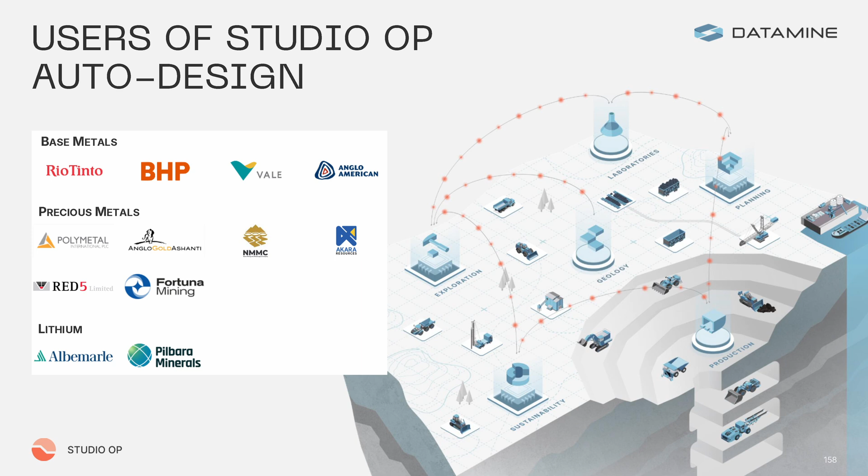So if everyone here is strategic, you would all have a good understanding of NPVS and MindMax. You may not know quite as much about Studio OP. OP is our design, reserving, and tactical scheduling solution. What it will offer everyone in this room the most benefit is the ability to utilize our auto design toolset, and that is what the majority of the updates provided in this presentation focus on. Being our premier design package, it is used globally and by a number of major operators across a significant amount of base, precious, and alternate metal operations. I know a few of the guys in this room I've worked with previously on support, specifically for OP Auto Design.

And what I would like is to be in a future where everyone's strategic schedules are just like Mario's, where everything is using auto design. Auto Design is definitely the package that is able to provide that capability. And for everyone that is coming to the workshop tomorrow, you're going to have some fun. We're going to do 2 phases within 20 minutes, hopefully. Let's see how we go actually getting the licenses to turn on first.

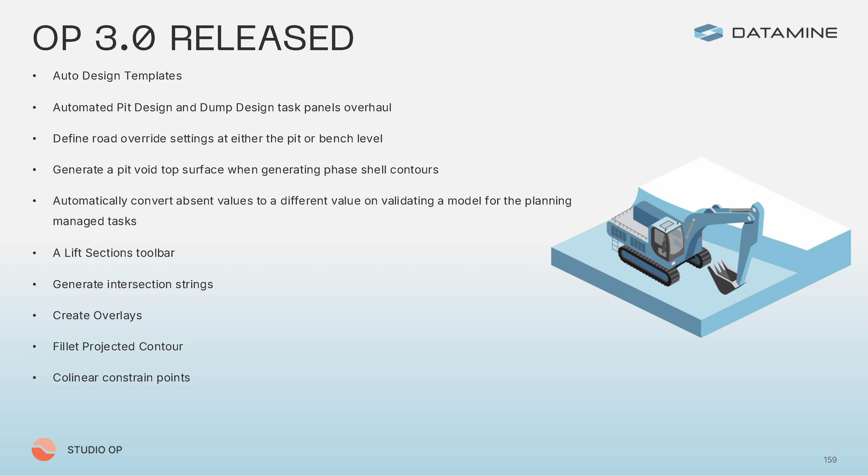Looking at the major capabilities that were released in our latest 3.0 release, we provided updates to auto design templating, updates to automated pit design and dump design task panels, just improving that UI for usability. Road definition override settings are now at the pit or the bench level, generating some pit void top surfaces, automatically converting absent values, lift sections, etc. And some of these I'll go more specifically into with some videos so everyone can actually see what I mean.

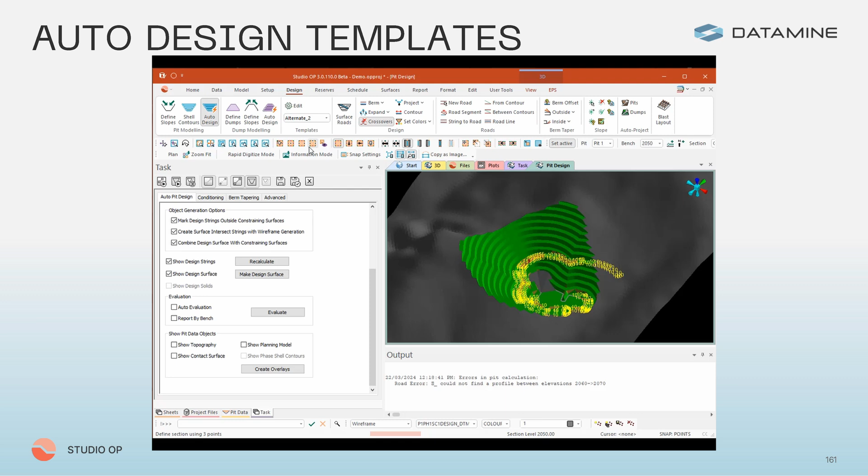Looking into some of the specific capabilities that we've improved in 3.0. So with OP 3.0, Auto Design now incorporates a visual templating toolset. With the Auto Design templates, you're able to define and rapidly change how you visualize each of the design controlled objects. These include the design, constraint, and centerline control strings, as well as the wireframe surface and solid, and finally the block model that's associated with that design.

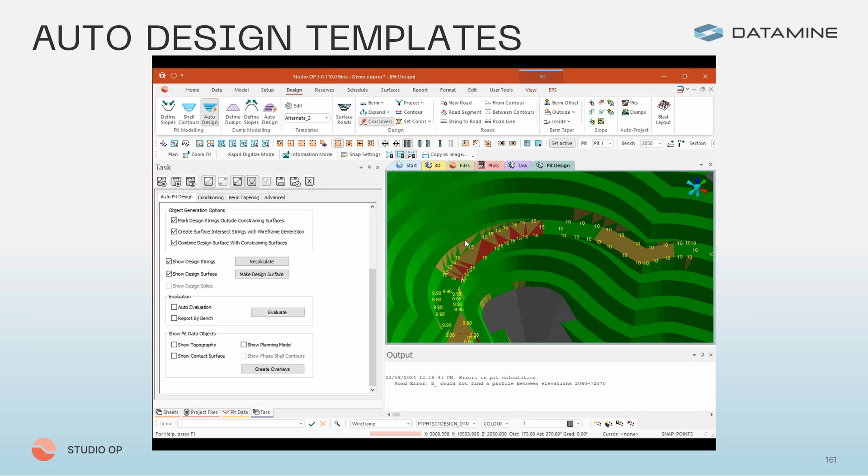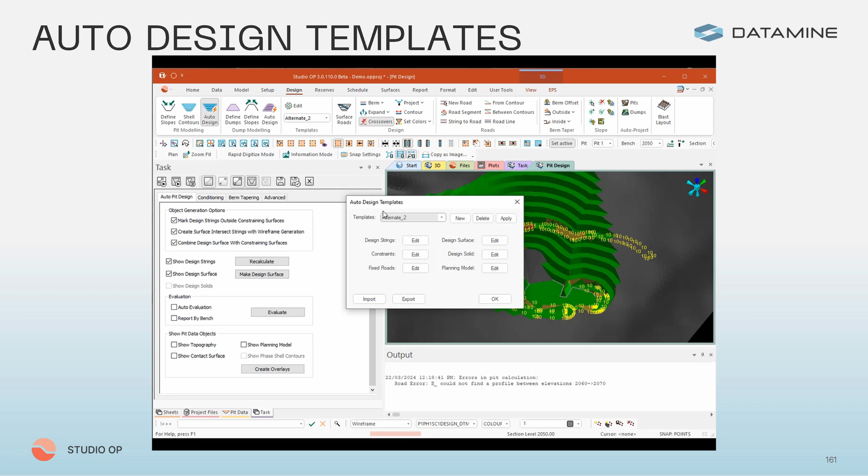This does obviously have a number of significant applications, both within the design workflow itself, as well as external communication capabilities. We are also able to share team or company visual styles, to be able to have easily accessible view states for common design requirements, all the way through to compliance checking and screenshotting for use in presentations or release packs. The templates can be changed on the fly through the design ribbon, as well as exported and shared with other team members.

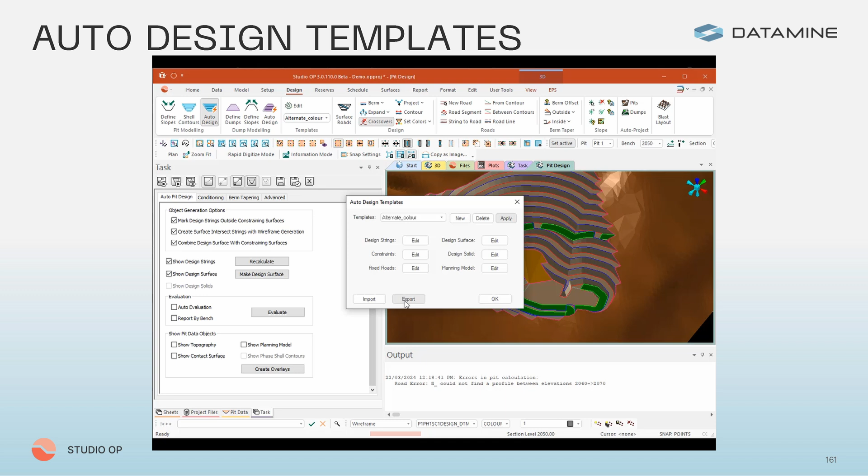Looking at our adaptive road controls, Auto Design road definition and editing tasks have been streamlined. This includes context control for the new and edit states, which were previously separate tool sets. This allows the system to guide the user through what controls they are able to use at each stage of design.

The start and end elevation controls now also provide the ability for the user to either control directly through 3D selection or by selecting the elevation directly.

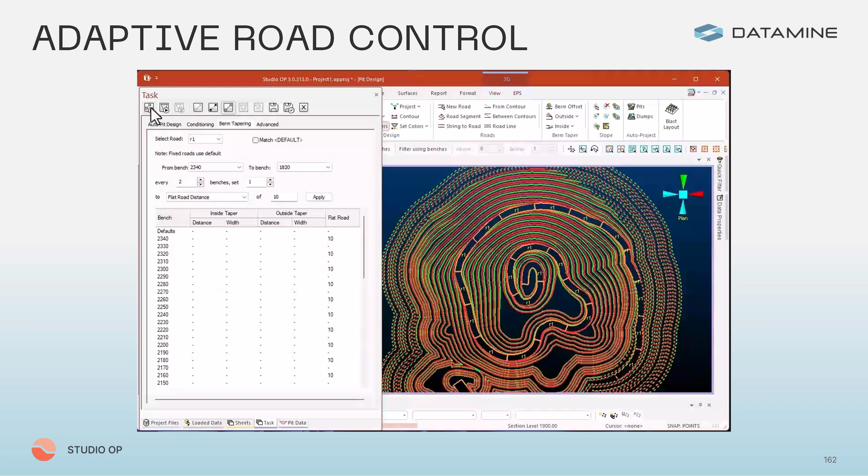Additionally, the berm tapering controls have been updated so that each road can be independently assigned tapering and flat definitions. Patterning controls have also been included so that you can speed up the application of repetitive controls.

On the geotechnical standpoint, the user is now able to specify if they want conditioning fillet controls applied to projected objects. This enables better control of the design, batter compliance, and enables bullnoses and other features that were not easy to implement in previous versions of OP Auto Design.

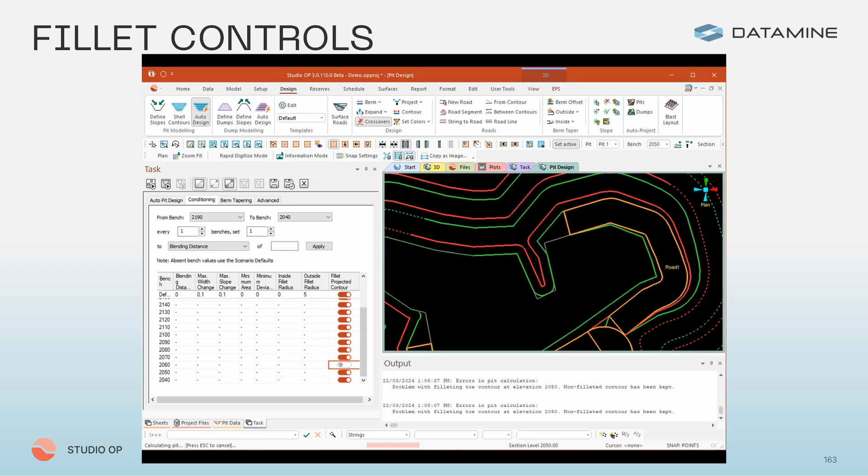By default going forward, projected objects will not be filleted so that we better comply with geotechnical constraints, though it can still be turned on if that's a desire from the specific client.

We also provide a new advanced projection option. Under the advanced tab, you're now able to select the use of square projection rather than filleted projection and offsets.

This does obviously significantly increase the unwanted material that is included in the pit design, but it is an option that has been requested by some clients where they desire specific square projections, either for drill and blast or for alignment with historically existing designs.

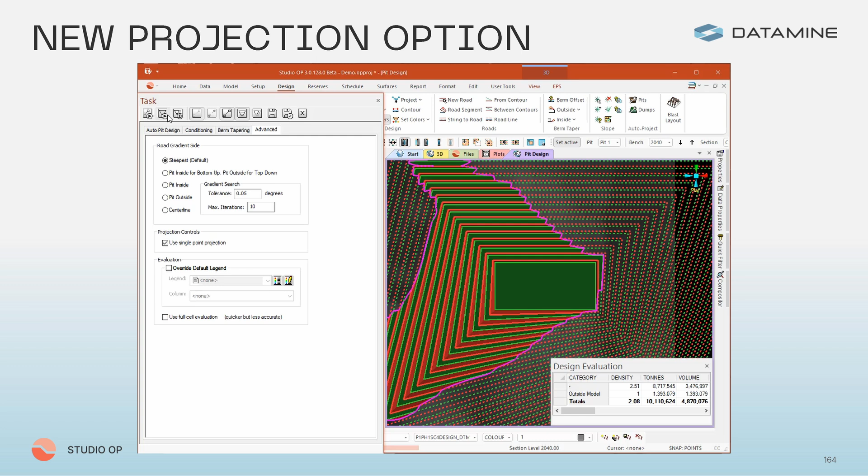So as you can see, a square shoulder goes nice and pointy and increases material. In this case, I think it increased the amount of material needed to be mined by 10% for no benefit.

So please maintain filleted projections - well, not filleted projections, because we also do filleting, but continuous width projections, where one point becomes a radius of points. It aligns with reality a lot better. When you blast a single hole, you end up with a cone, not a perfectly square corner.

And finally, collinear control points. To allow better control of geotechnical compliance, Auto Design will now keep collinear points that are defined on a constraint object. This gives the user much greater control to pick up changes in geotechnical conditioning and compliance, especially where there are significantly large flat walls within that design.

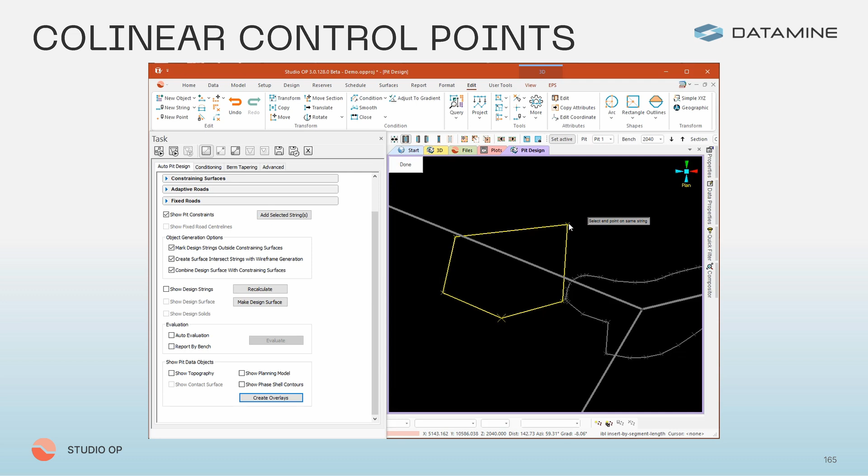So what's happening in this video is that's the constraint object defining that push out of the toe. A number of points have been inserted along that constraint, and when this is regenerated, you can see that there is now tapering occurring due to that section now picking up the geotechnical change.

And finally, a look ahead at the development focus for Studio OP. We're looking to further improve auto design, predominantly through a focus on updating how we implement fixed roads, as well as providing geotechnical assignment by scenario.

At the moment, geotechnical definition is at the pit level. This will allow you to define it individually by scenario so that you can test things such as alternate patterning of double batters, different geotechnical risk assessment profiles, and then do comparative analysis of those.

We're completing a major overhaul of the manual pit design toolset so that it will tie directly into the auto design logic. This means your manual designs will now directly tie in to the auto designs you're generating, rather than having a situation where you get your auto design, make one minor edit, and that projection's all square and doesn't look anything like what auto design would have implemented. It will now be aligned.

You'll also have significantly improved manual tools for slot cuts, adaptive ramps, etc.

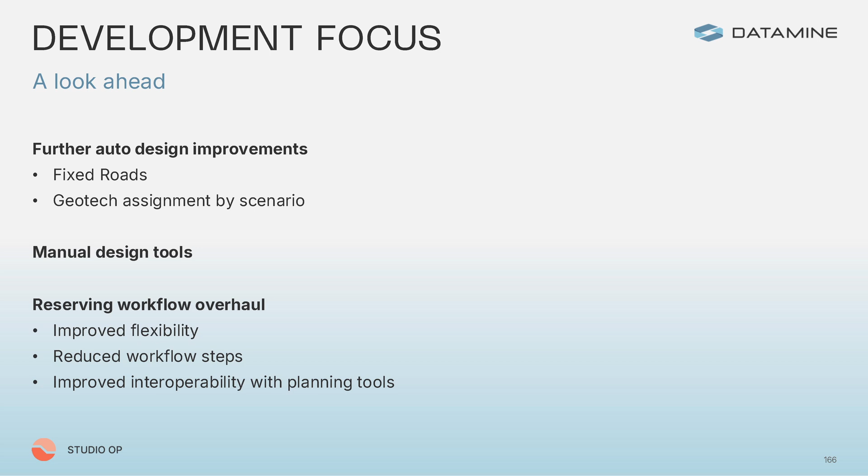And finally, we're looking at a complete overhaul of the reserving workflow. This is to improve the flexibility of the system, reduce the number of workflow steps required to generate a set of reserves, and to significantly improve the interoperability of the OP reserving workflow with other planning tools other than OP Schedule.

There's a big focus on making sure that this works with much improved capability with NPVS and MineMax directly, so that you can go from an NPVS pit and phase optimization into a proper set of designs with ramps, and then back into NPVS or MineMax for a significant strategic schedule.